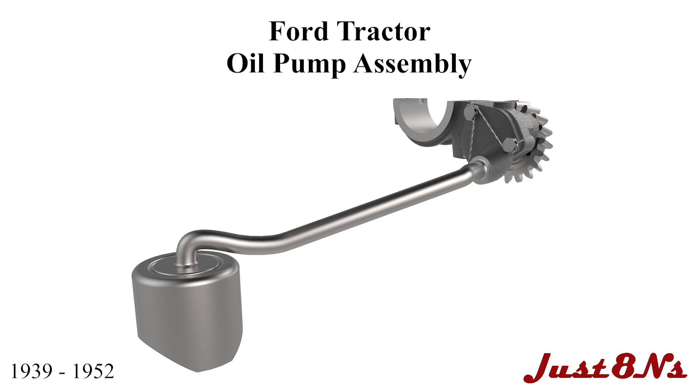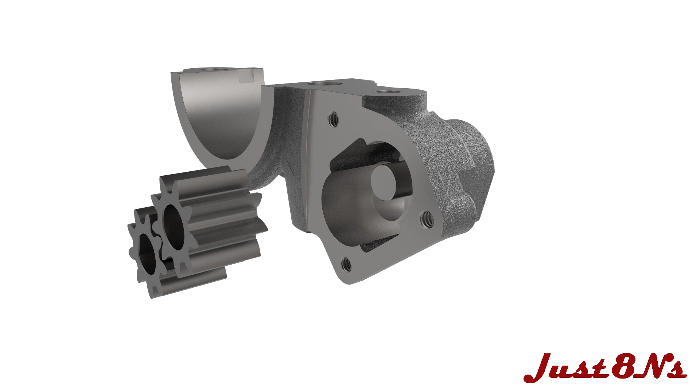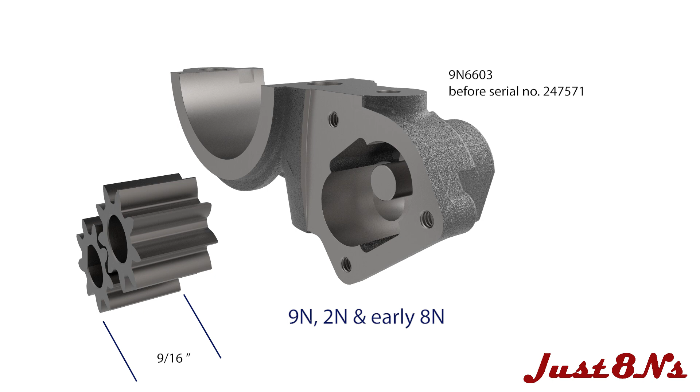This video covers oil pumps found on engines built between 1939 to 1952. Two variants of the oil pump body were used from 1939 to 1952 and are not interchangeable. The early oil pump is found on 9N, 2N, and early 8N tractors with serial numbers before 247571, and these had gears with a 9/16 inch width. The later 8N oil pumps, found on tractors with serial numbers after 247570, had gears with a 3/4 inch width.

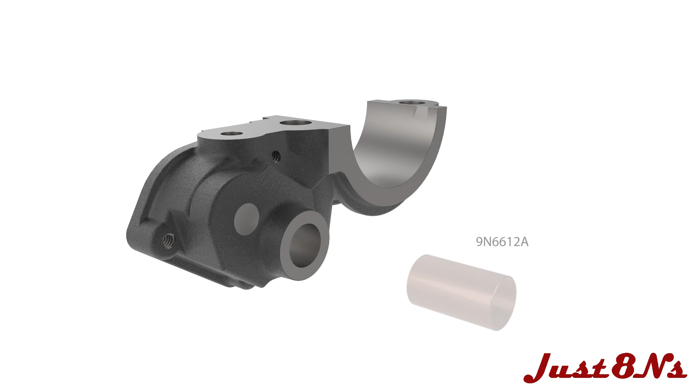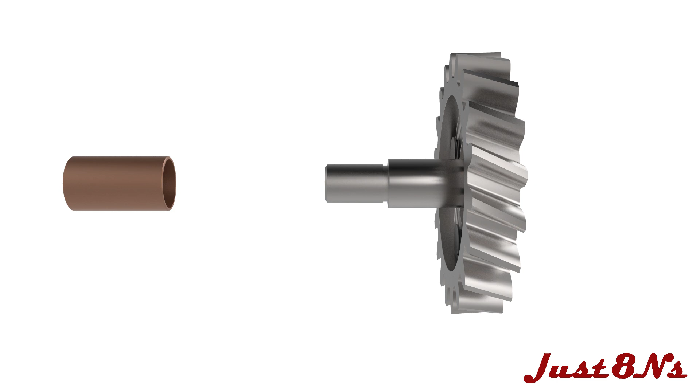Begin by installing a new drive gear bushing. After installing the bushing, it is critical to create a proper fit between the bushing and the drive gear shaft journal. Failure to ensure the proper fit to exact specifications can lead to premature oil pump failure and ultimately to engine damage. The minimum acceptable diameter for the drive gear shaft journal is 560 thousandths of an inch, and the maximum inside diameter of the bushing is 566 thousandths of an inch.

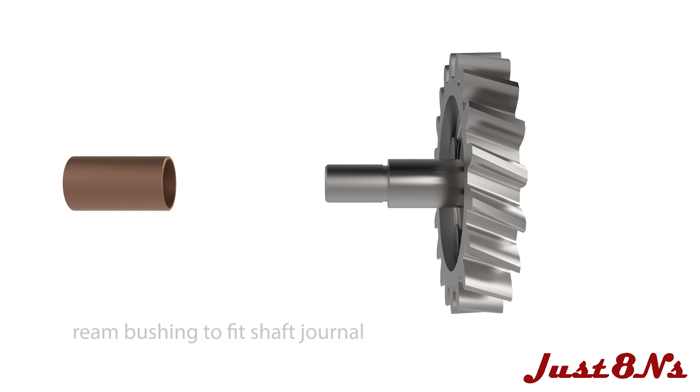If either of these parts are outside of the specification, then they must be replaced. Just 8N's recommends having a machine shop ream the bushing to fit the drive gear shaft journal outside diameter to ensure both the correct clearance and concentricity of the mating parts. The correct clearance between the shaft journal outside diameter and the bushing inside diameter is between 5/10,000ths to 15/10,000ths of an inch. Note that the bushing is installed in the housing prior to machining.

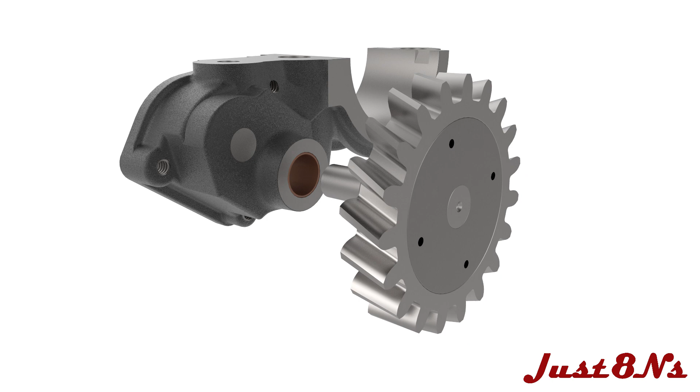Install the drive gear shaft assembly in the bushing. Then install the drive gear on the shaft followed by the driven gear. The clearance between the driven gear and its shaft is between 25/10,000ths to 45/10,000ths of an inch.

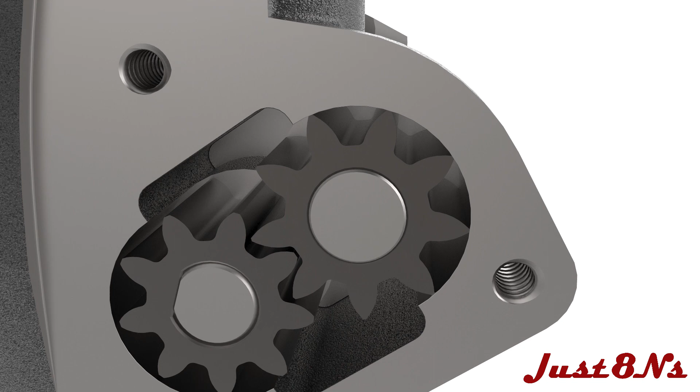Check the backlash between the gears. Rotate the driven gear until its tooth is in contact with the drive gear tooth. Where the gear teeth are in contact, the clearance on the opposite side should be between 3 to 4 thousandths of an inch. The clearance shown here is exaggerated for clarity.

Now install the gasket on the face of the pump body.

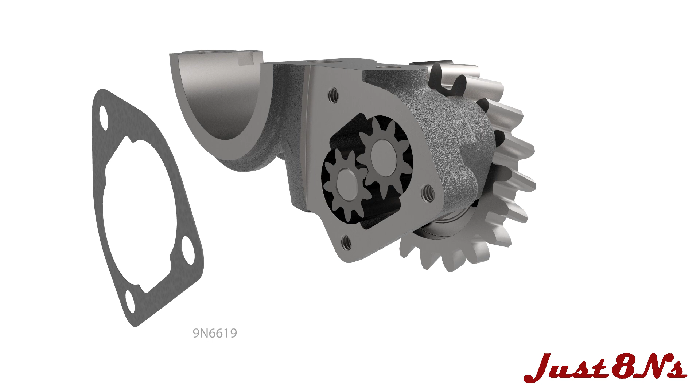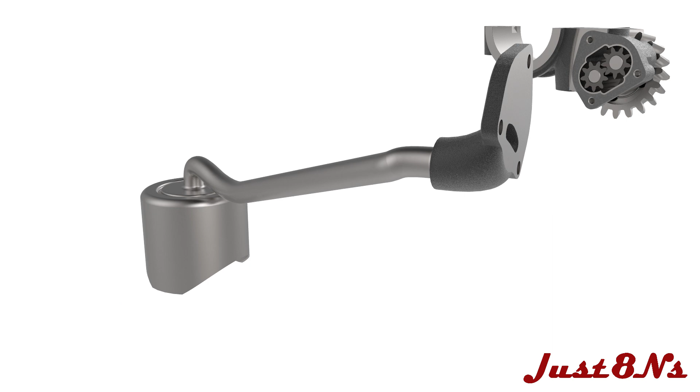The pickup tube assembly is then mated to the pump body, but prior to assembly, verify that the face of the pickup tube body is not nicked, marred, severely scratched, or warped. If there is any doubt about the integrity of the pickup face, the surface should be machined flat. The clearance between the pump gears and the pickup body is provided by the gasket thickness, and no further adjustment is necessary. Secure the pickup tube assembly to the pump body with 3 drilled head bolts.

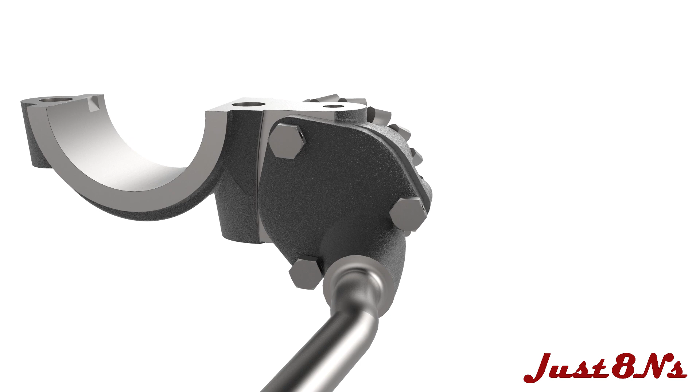It is critical to safety wire the bolts exactly as shown to ensure that the bolts do not loosen during operation, as there is very little clearance between the bolt heads and the crankshaft counterweight. Any movement could result in the counterweight contacting the bolt heads and causing severe damage to the engine. Loose bolts can also affect the operation of the pump, resulting in low or erratic oil pressure, resulting in engine damage.

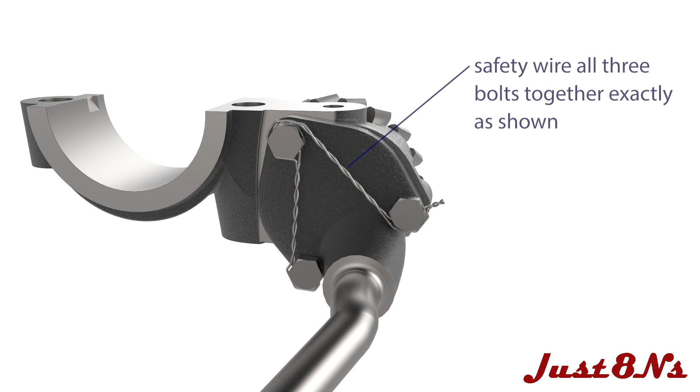After installing an oil pump on the engine, it is crucial to verify no interference with the crankshaft by rotating the crankshaft through a full revolution and inspecting the clearance with the oil pump.